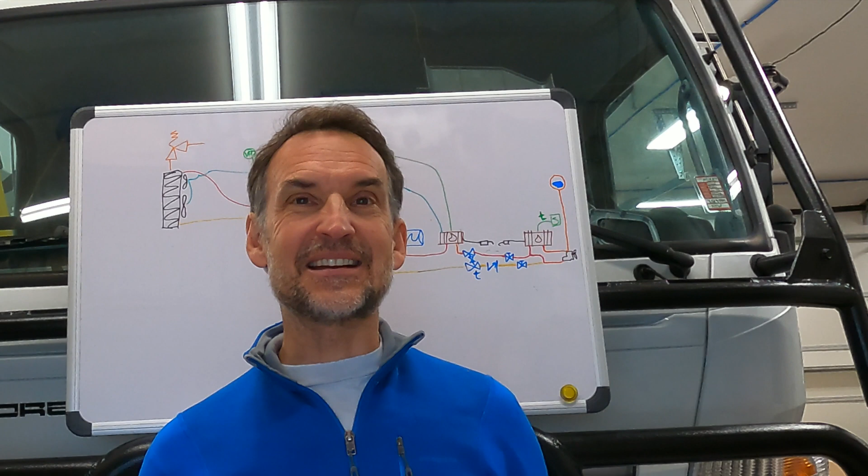Hey van campers, how do you keep yourself warm and heat your van and your water while you're camping outside in cold weather? As you can see today, I brought it all out for you. I've been growing out my scruff because it's been cold and it's wintertime and I'm trying to keep myself warm. So today we're going to talk about van heating systems, how to heat hot water, how to heat the air, all at the same time in a do-it-yourself system. So let's get to it.

All right, so you want to go skiing, right? You want to camp out at the ski resort, or you want to boondock and camp outside nearby. Something I've done quite a bit of. And how do you keep your van warm?

Number one thing is really good insulation. I've talked about this before. Great insulation in the walls, the ceiling, the floor, and also the cab area. I've also talked about why I like curtains, because they overlap. They don't just insulate the windows, but they overlap the window frame and the door frame as well. Then they keep that warm, because most of these van windows have a very poorly insulated window frame. So even if you're insulating the window with a little window shade, you still get cold air, or heat, being transferred through that window frame. So curtains cover all that up and help you insulate all of it. They can also separate the cab, or at least insulate your windshield and other areas like that really well.

Bottom line is, we're going to get into hot water and heating systems today. We're talking about what I did in my van, Mountain Bluebird. I've talked about before how I've loved to go out and camp in the cold and the snow. I'm looking outside right now and there's feet of snow outside, and I've been camping out there. I'm actually going back out tomorrow morning, and I'm looking forward to being out there, even though it's going to be cold. The weather forecast is saying it's going to be down to about 0 degrees where I'm going to be camping. Now, how am I going to stay warm?

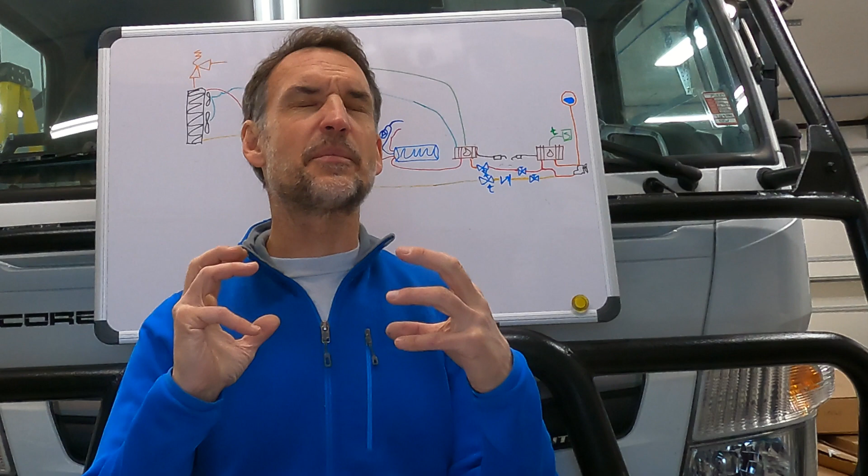I did this with a hydronic heating system. My last van, I did with an air heating system. An air heating system is very much like the D2, as it's commonly referred to, the Diesel 2 air heater, made by either Espar or Webasto, or a couple of other manufacturers. It connects right into our diesel fuel tanks on our Sprinter vans, which have an auxiliary fuel output. Those are about the size of a shoebox, incredibly compact. They put out a tremendous amount of heat and heat up very quickly, which is great for getting really quick heat in your van.

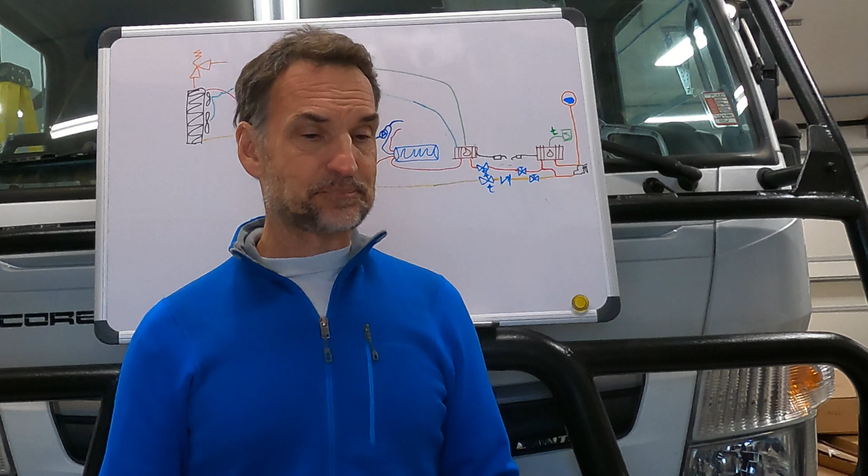But they do not heat hot water, and that's the downside. They're also pretty noisy, which is the other downside. When I had my D2 in my previous van, I didn't have any hot water system, so all I could do is heat the air. Still an advantage, but the downside is I found it pretty noisy, and I did not like using it because of the noise it created.

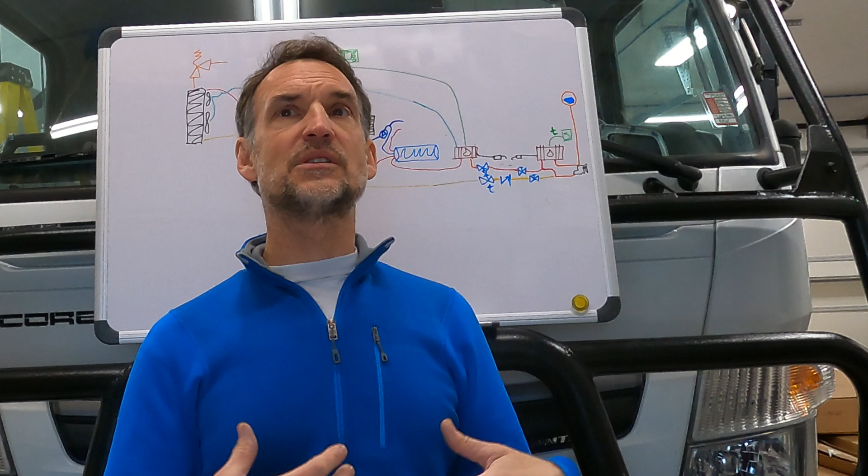So I wanted a quieter, more gentle heating system in my new van, and also one that heated hot water. One of the ways to do that is with what's called the D5, made by the same manufacturers, also using diesel. There's also the B5, which uses gasoline or petrol. That heats hot water. So if you're heating hot water, how do you get that to hot air? I'm going to talk through it here.

There are a lot of different people who make hydronic heating systems, and people will install air heating systems. If you're not comfortable doing it yourself, by all means have someone else do it. There's lots of information available on YouTube and other places to learn how to do that. It isn't too hard to install an air heater. It's pretty simple—you basically drill a hole in your van, connect an auxiliary fuel line, and hook some power up to it. Maybe those things sound scary to you. If they are, they're not that difficult, but by all means just have somebody else do it for you. There are plenty of qualified and experienced installers out there.

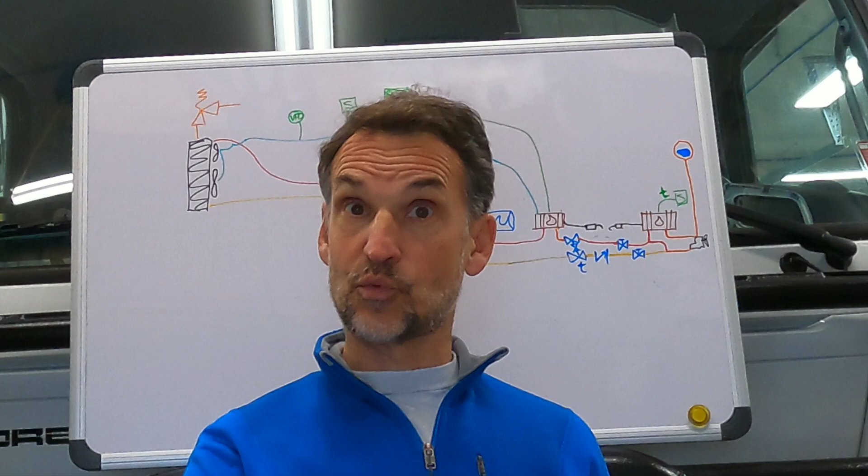When it comes to the D5, it is more complex. You're also running water systems to it, both a supply and a return, a cold and a hot line going to it, and it's a bit more complicated than that. There are companies out there that make really good hydronic heating systems—Rixen's is a great example. You can go to Rixens.com and buy their package, and either have it installed or install it yourself if that's more comfortable for you.

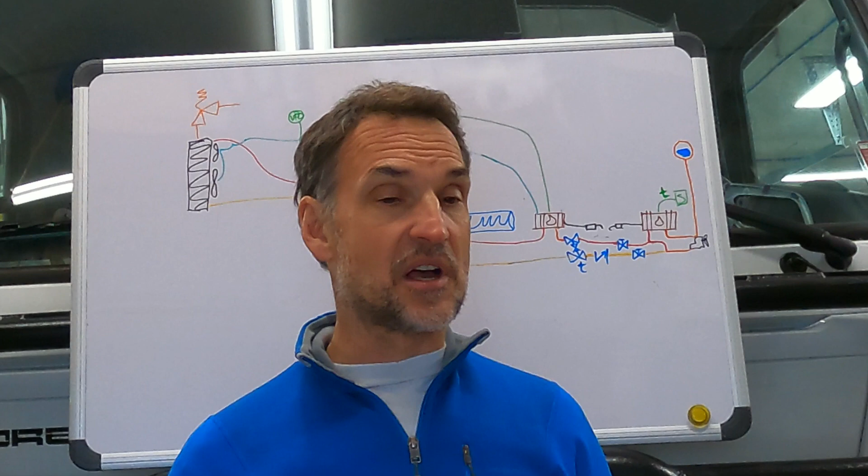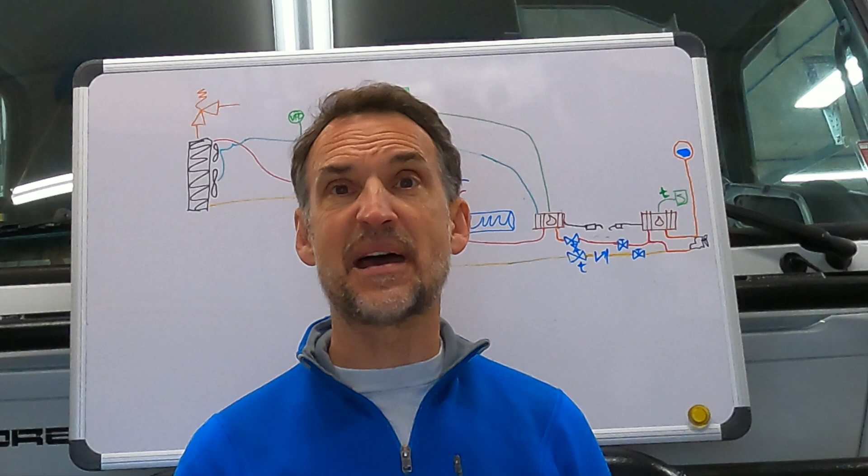I chose to take the do-it-yourself approach. So I basically figured out all the components that I needed in the system to make it work, and I found that it works tremendously well—actually a little better than I had even anticipated. I'll go into more detail about how well it works, but let's go into how it actually works and what I installed.

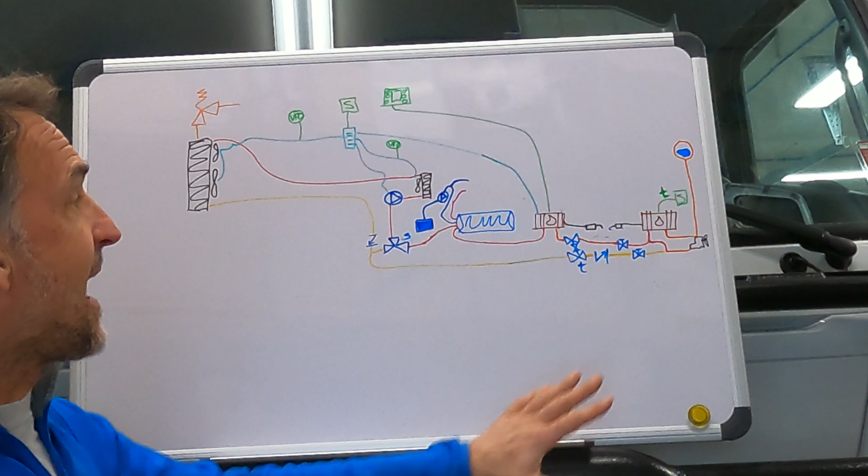We have the factory D5 right here, designated by this, which my Sprinter van I ordered with the factory D5. Unfortunately, that will only run when it is below 37 degrees—when the temperature sensor on the van detects it's 37 or below, then I can run it. And I have to have the engine running to run this one as well.

There's 4 different heating option systems with auxiliary heaters that Mercedes offers, which is fantastic. But I chose the one where it does have to have the engine running and it has to be below 37 degrees. Now, this is really an auxiliary heating system.

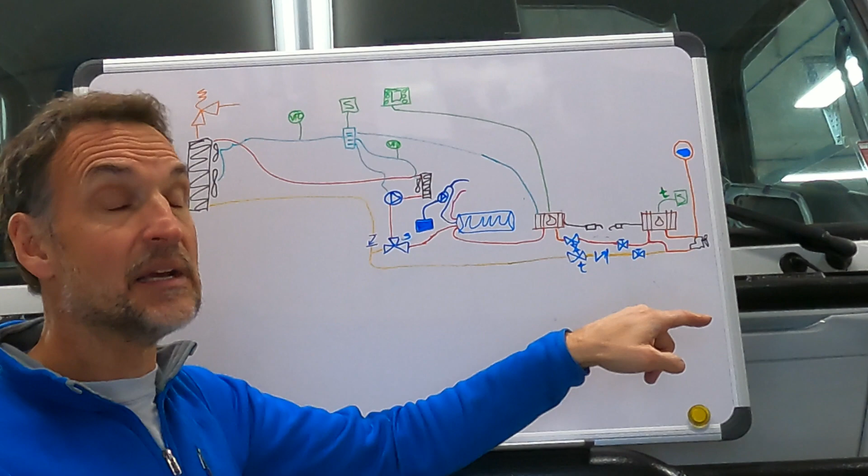It heats the engine up much quicker when it's really cold out, which is great because this diesel engine does not heat up well when it's really cold and there isn't much load on it. So like coasting down a hill, for example, or just cruising on a flat highway without a load. If you're climbing a hill, great, or even around town, it'll eventually heat up, but it does take some time. But that helps heat it up much, much quicker.

And I can idle the engine for 5 minutes or so, or even just a few minutes, and within those few minutes I'll get the engine coolant up to at least a moderate temperature to start getting a little bit of heat out. Now, the Sprinters also have an electric heating within the dash, and those auxiliary heaters will turn on when it senses it's cold and it doesn't have warm coolant yet going to it, and it'll actually put out electrically heated air out of the dash.

Now, it's not hot yet. It won't really get hot until we get up to a higher coolant temp, when that also augments the electric heating. And then once it gets about 175 degrees Fahrenheit coolant temperature, it'll shut off the electric auxiliary heaters. You'll actually see your voltage pop up a little bit, maybe a tenth of a volt or so when those shut off, because they're a pretty substantial load. I think they're about 40 amps or so. And you also will feel warmer, hotter air by that point too. But this helps it get there far quicker.

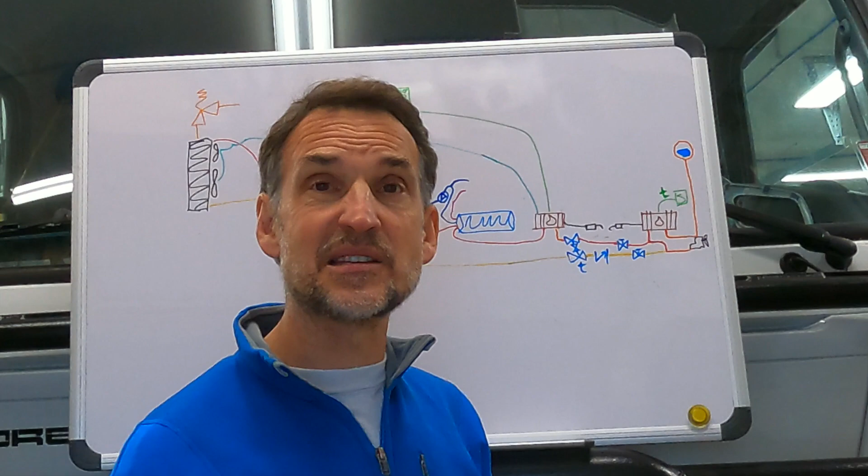And I found that when it's pretty cool out and I don't have much load on the engine, it can take 15, 20, even 30 minutes for the engine to even get to a reasonable temperature, say between about 150 degrees to about 175 degrees. With the auxiliary heater, it can get there in about 5 to 10 minutes. So it definitely speeds it up quite a bit. It also gets you heat out of your dash much quicker.

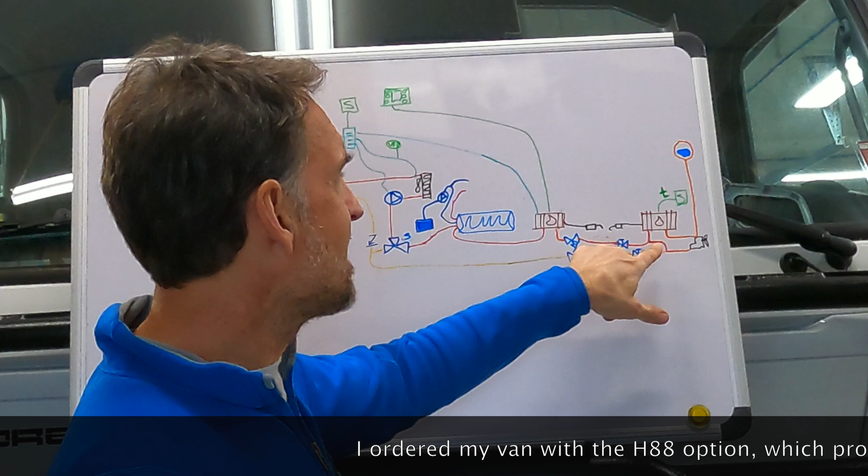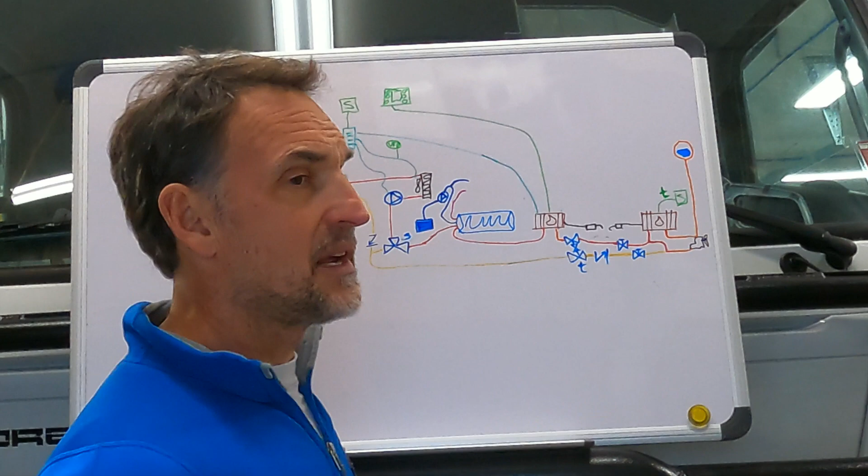Now, this system connects into the engine. And it is a switch on the dash, all through the factory system, and that's the temperature sensor that controls it. I tied into this system, I put in 2 isolation valves. That's what these are indicating here. So one in the supply, one on the return. And the supply then goes into basically an Espar factory product. They call it a 5 or a 6-way valve.

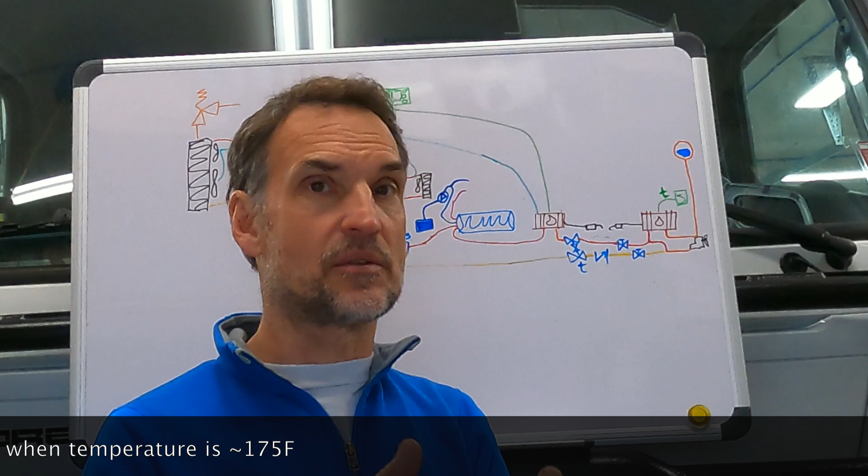It's a thermostatic valve, and it has a little thermostat sensor in between the two linkages that will open up if it's above, I believe it's 175 degrees also. And so in that case, if I've got hot water coming from the engine that's 175 degrees or hotter, it will allow that to go on to my heating system. If it's not above that 175 degrees, then it will not go into my heating system.

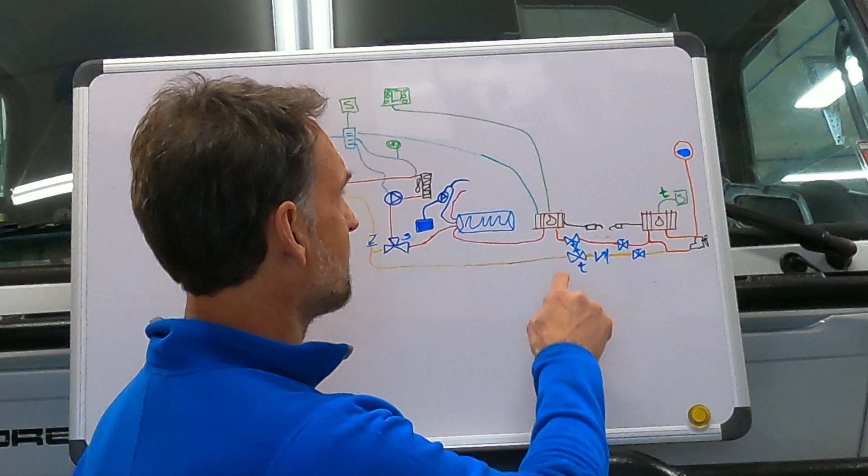And really I should have a pen here, but there's a linkage here between these two that isn't shown, and I should have shown that here. These two link in really to that same spot here. So I should have drawn that a little bit differently, so my mistake there. So basically the hot water from the engine and the factory D5 will go on to my hot water tank.

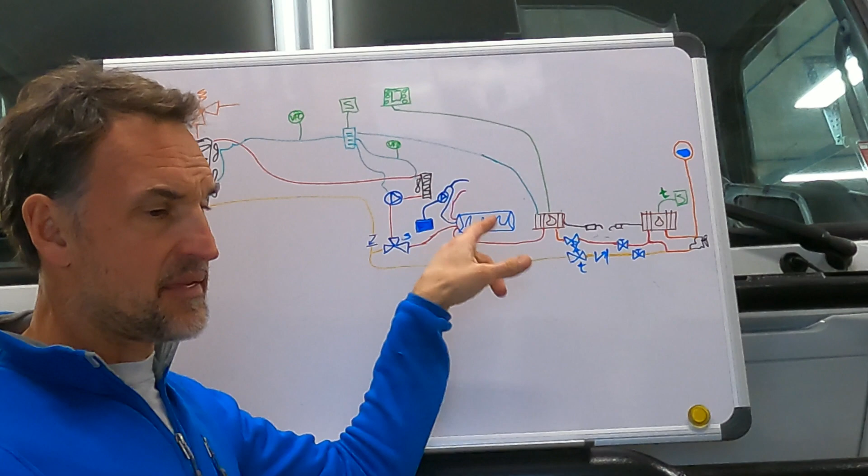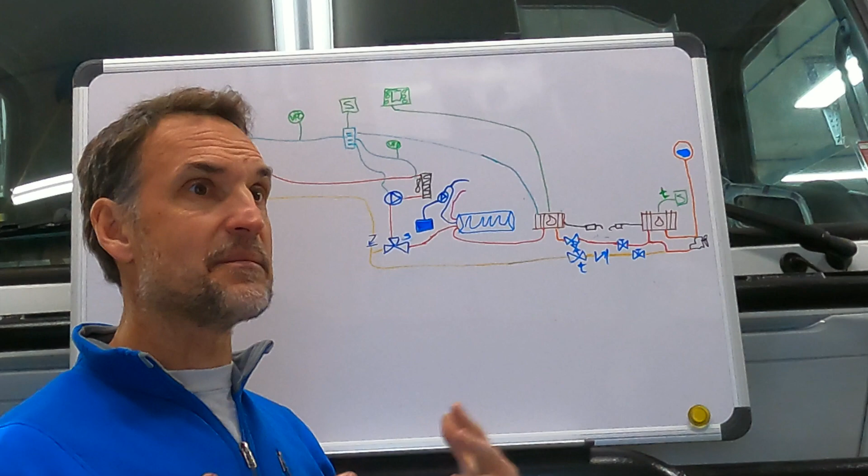This is an IsoTemp Slim 5-gallon model. It fits incredibly well between the factory sill and the internal frame, basically between the fuel tank and the outside of the body. Fits incredibly well in there, and they have 4, 5, and 6-gallon versions of this.

It has a coolant heat exchanger in there. So the hot water coolant will go through that exchanger, and in there is a hot water tank, and it'll heat the hot water, right? It transfers that heat from the coolant to the hot water, and then it can pass on that coolant onward.

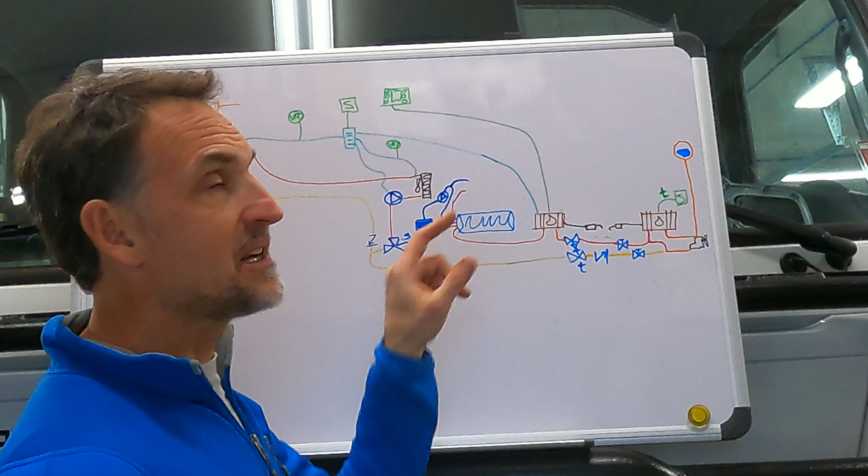Before we get to that, let's talk about the second D5 that I installed, and that's this one right here. This second D5 I can control by my single switch, that single switch being up here. When I turn that single switch on, it also powers my 2 fan coils, one in the front, one in the rear. The one in the rear is larger. It's right underneath my bed, so it heats up the garage and the bed area very nicely. There's one in the front, which heats up underneath my front seats.

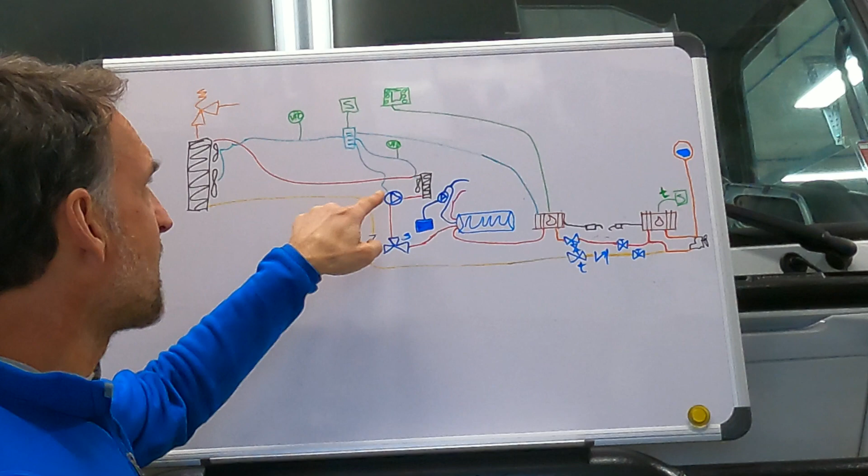And I say the front seats, my front camping seats, not the passenger and driver seats. And it heats that up. It also powers my variable speed fan controls for those fans. It controls my pump, which circulates that water, and also the thermostat for the D5. Let's get into all that in just another minute.

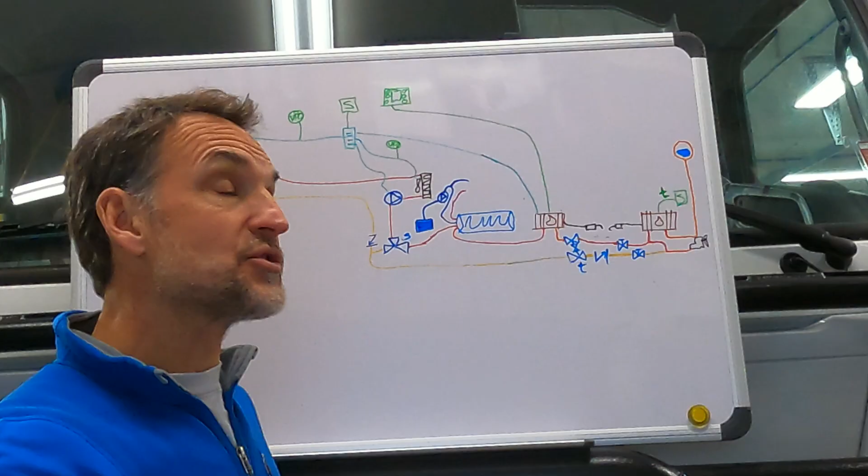This hot water from either D5 will go on to my IsoTemp hot water heater, and that heats hot water that goes on to all my plumbing fixtures. This is my pressure pump for my domestic water system, which pulls from my tank, and that goes out to all my fixtures from here. This hot water comes in, heats that coolant, and then it goes on to this 3-way valve, which is also switched by my switch up here. So when I turn on my one heater switch, it activates my fan coils, my circulation pump, my secondary circulation pump, and opens up this valve.

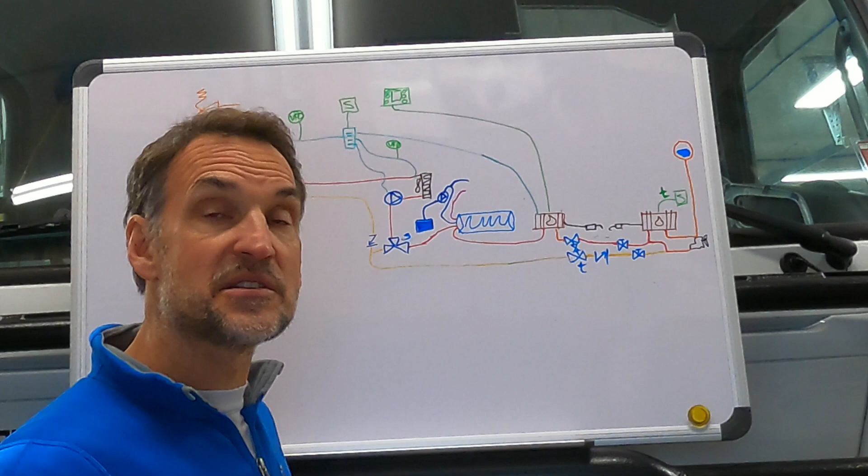The reason why I have this valve in here is so I don't have hot water flowing through my fan coils all the time whenever that coolant is above 175 degrees, heating up the interior of the van unnecessarily when it's not needed. Otherwise, when that switch is off and closed and I don't have heating called for, that coolant simply returns back into the engine system.

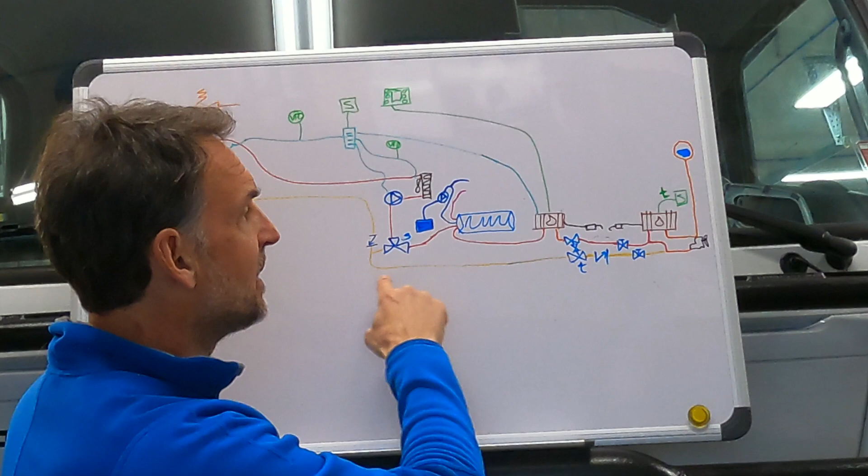A couple things to note here. This is a check valve, so that coolant cannot go backwards up through the coolant system. There's also another check valve here, even though this is my return, because the coolant is generally circulating pretty freely through the engine. There isn't really so much a directed supply and return on the engine. This way, it can't come backwards as well.

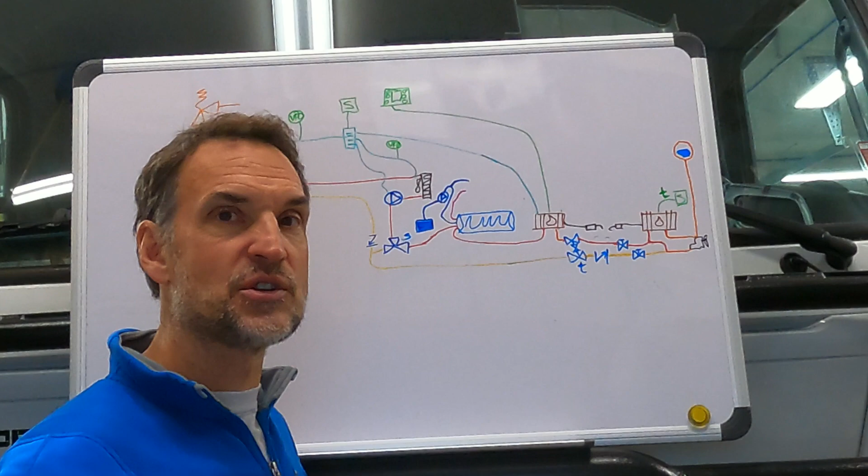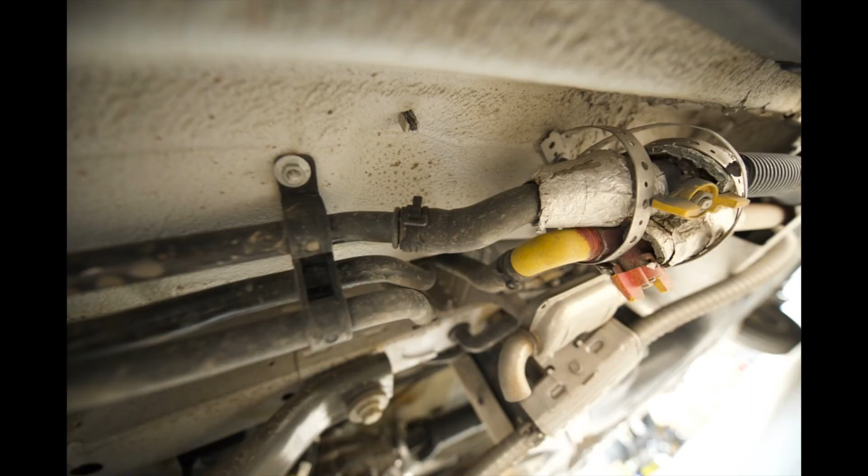Another point I really want to make, and that's my third point, is that this whole coolant system is at the same level. The benefit that provides me is pretty big. I don't have to have my own expansion tank for my heating system. The coolant reservoir expansion tank for the engine happens to be higher than both of my fan coils, even though they're not quite drawn this way. Both of my D5s are mounted exactly at the same height, as is the hot water heater. The bottom lines are all below the expansion tank for the engine, which is pretty high up on the van.

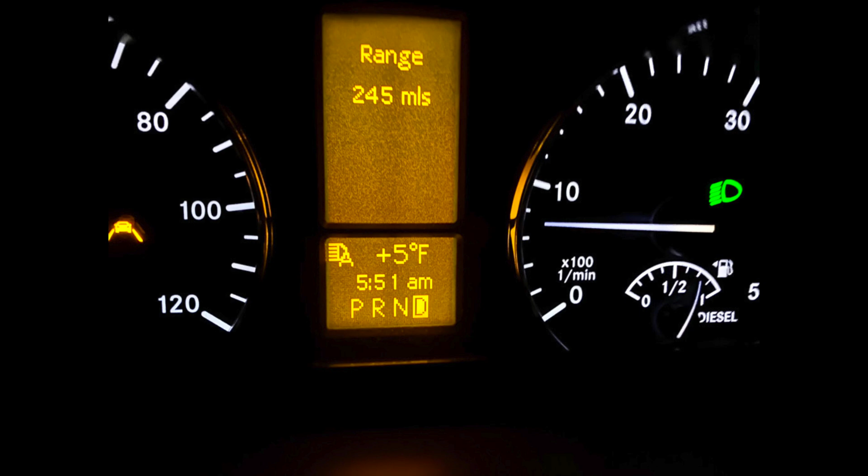This means I don't have to have a secondary expansion tank inside the van, with the potential for leakage or fill issues. I have one place to fill my coolant system. It's all combined together. From a safety point of view, these 2 isolation valves allow me to isolate that off. I've not had a single leak in the system in 5 years of operation. I've camped down to 5 degrees, and I've driven and camped in lots of temperatures below freezing and have been perfectly fine and warm.

All of my system has fittings and hose that are designed and rated to handle basically between -40 and, I think, 250 degrees operating temperature. Some of those components can handle even more. That's in Fahrenheit, but -40 is the same in centigrade and Fahrenheit. That's the temperature rating that all my components can handle.

So I know they can handle what the engine can throw at it, which basically tops out at about 230, 235 degrees Fahrenheit, and certainly what I'm going to camp out in, which is probably nothing below -20. The 5 was even probably an anomaly. Normally I wouldn't be camping out even below 20 degrees Fahrenheit, but I know it can handle that. It's handled it fine. There is, of course, antifreeze in that. That antifreeze is generally rated to about -20.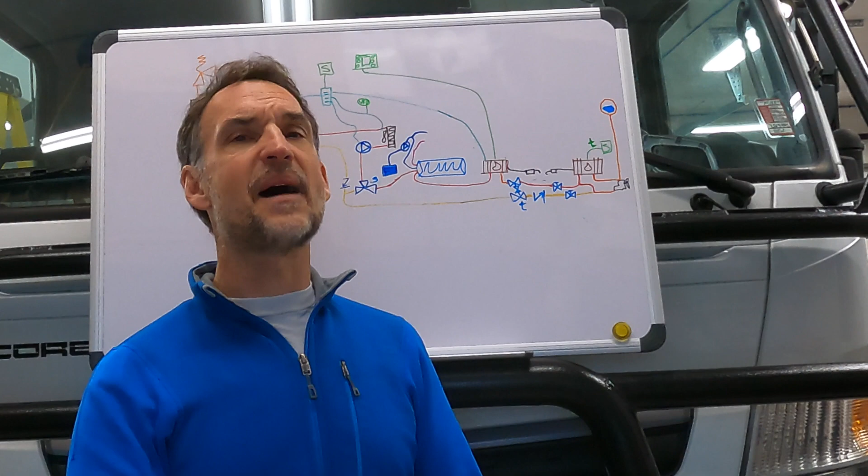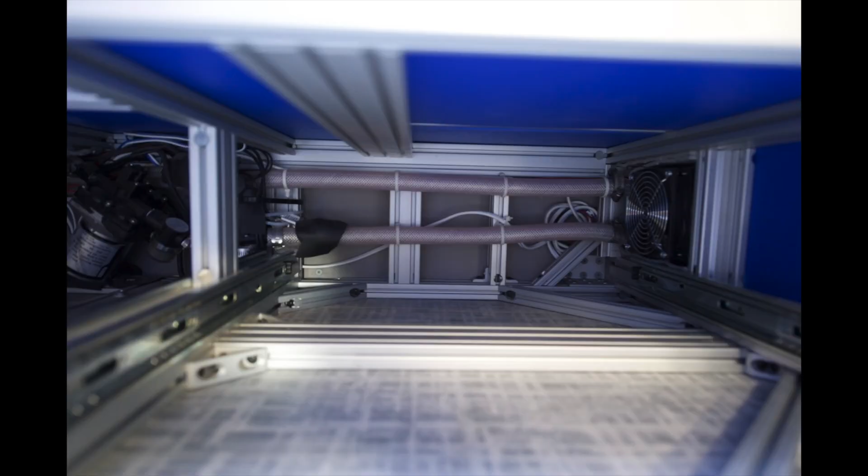So back to my system here. So hot water from the tank here flows on a 3-way valve. If that is open, because I've switched it open, my single switch that all this is powered from, then it allows that heat to go to my auxiliary pump, which also is powered by that same switch. Goes into the fan coil. The fans are powered by that same switch, and it just simply circulates through that, again through this check valve and right on back towards the engine.

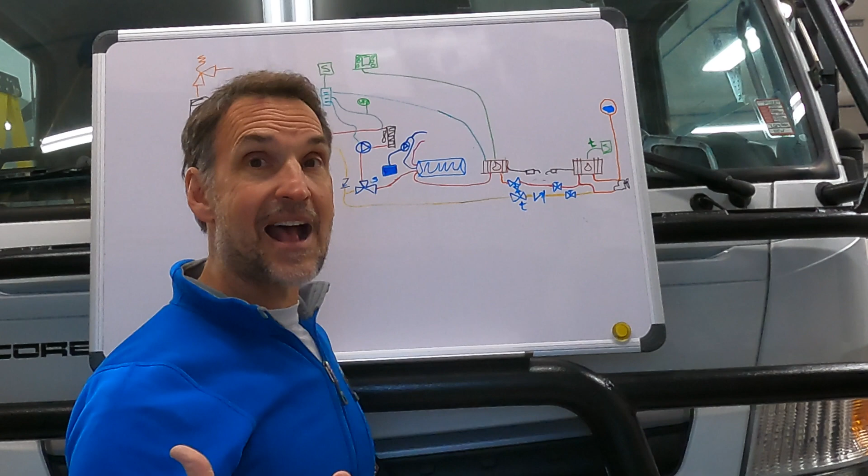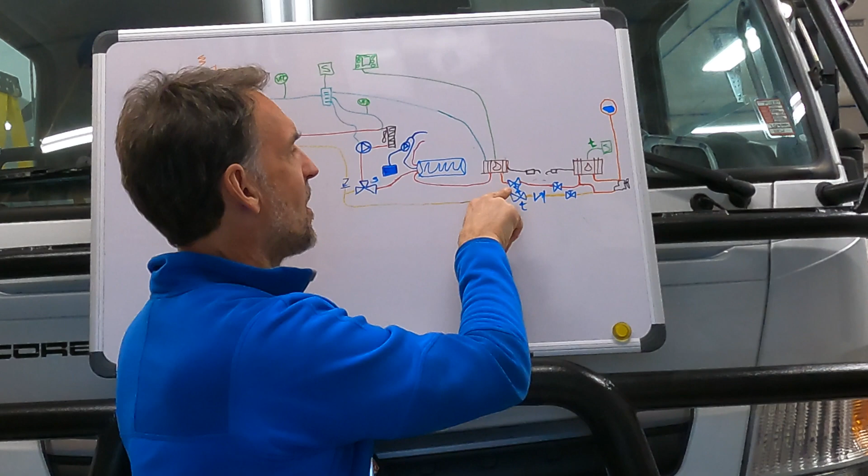Now, the reason why it goes back towards the engine, if there is a pressure that needs to be equalized, or some sort of hot gases that build up in there, it can escape onto the expansion tank and so forth in the engine. So same way as the engine's dealing with it. Otherwise, if it's hot enough, it will circulate back through my D5, if it's running. I have this drawn not quite perfectly, but it'll circulate back to the D5. The D5 will reheat it and it'll recirculate back.

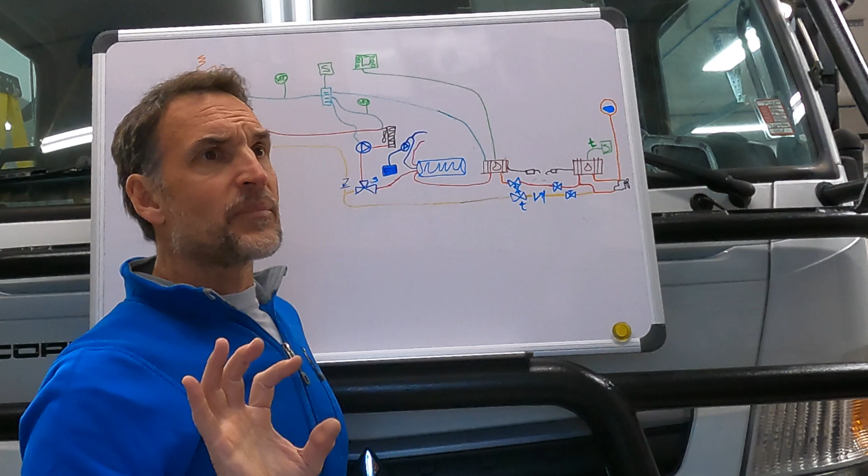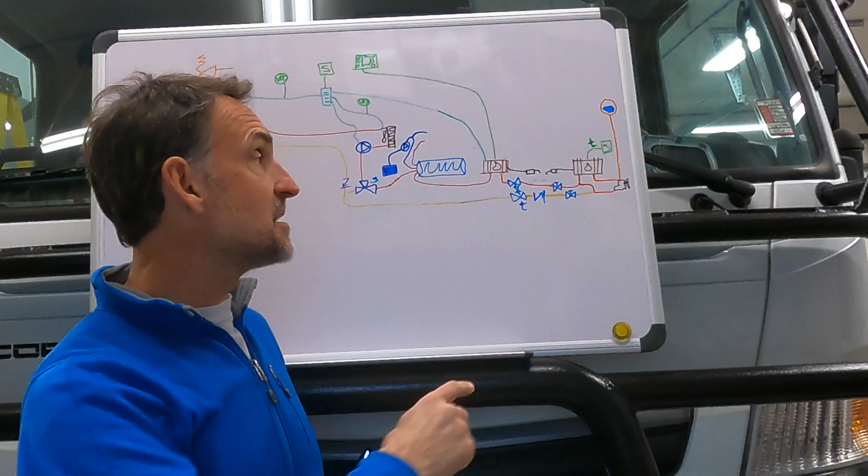And I can keep that circulation loop running through my heating system as long as I have that heating switch on. This circulation pump, and this will be open. And what I found is that once I shut the D5 off, for about 5 to as much as 15 more minutes, I still have heat that I can pull from that system, because this heating system's heating up to between about 100 to about 140 degrees or so.

So I've got a lot of heat in there, and a lot of heat's being stored in my hot water system here, this hot water tank. So I can keep pulling that heat from that for some period of time, so I can shut the heater off and still keep getting some residual heat without the heater running. It's a real nice benefit.

The other benefit the system provides is it also gives me a second auxiliary heater for the engine, so I can heat up the engine even faster, as well as the van. So by turning both these on at the same time, when I'm below 37 degrees and I start the engine, they both are now heating up. They both run perfectly fine off the single auxiliary fuel tap that comes off the fuel tank, and they just tee off of that for the fuel. They don't take much fuel at all.

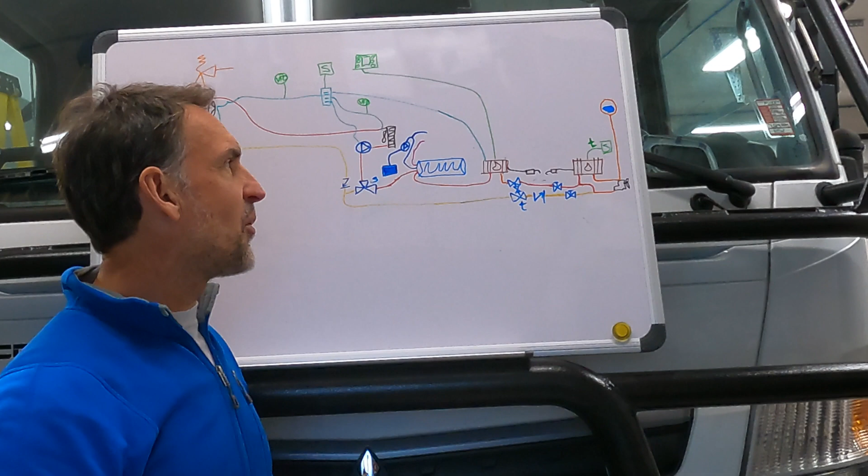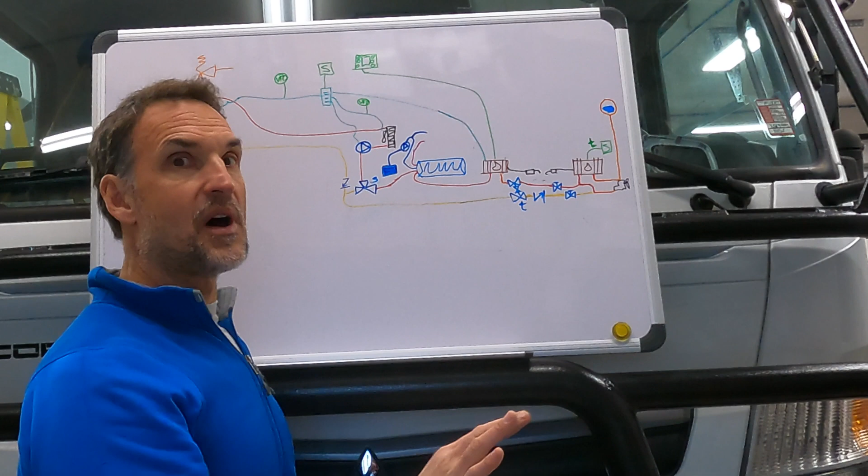They sip fuel. I think it's 0.06 gallons per hour for these heaters on their high mode. They have a high and a low mode, 0.03 gallons per hour in the low mode. So that little 1/4-inch tube, or a little less than that, 3/16 tube, is more than enough to supply that fuel. So I can turn them both on at the same time.

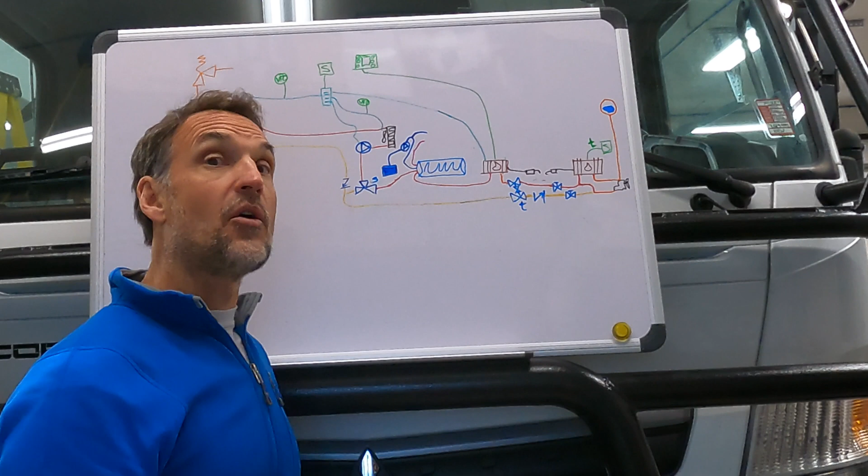Now what I've done is I'm heating this coolant loop to get more heat to the engine to help it heat up quicker. When it's really cold, I found that's definitely an advantage. I get heat then out of the dash, so I can get some warmth. And also I'm warming up the whole camper, which is cold because I've been camping out in the cold, right? And the engine's cold, so it gives it a chance to heat everything up quicker.

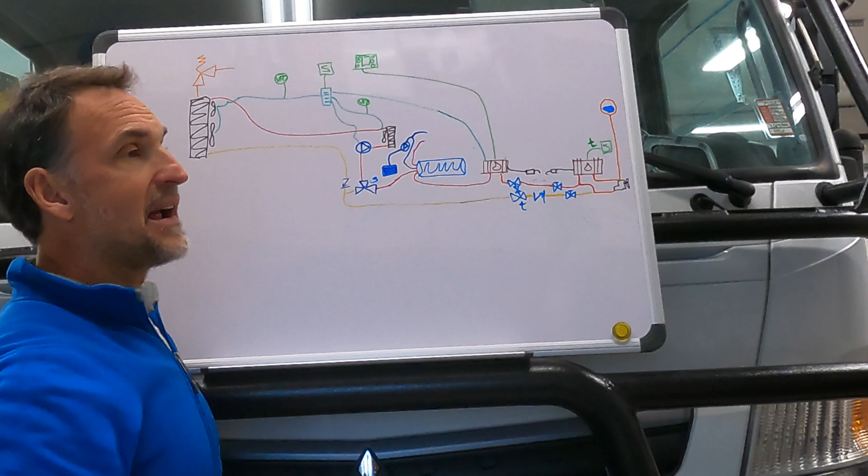Now, a couple of key points here I want to point out. My D5 is operated by the programmable thermostat, and so I can program that, control my temperature set points or time and period to run it and all that stuff, and that's on its own, so I can run the D5 on its own.

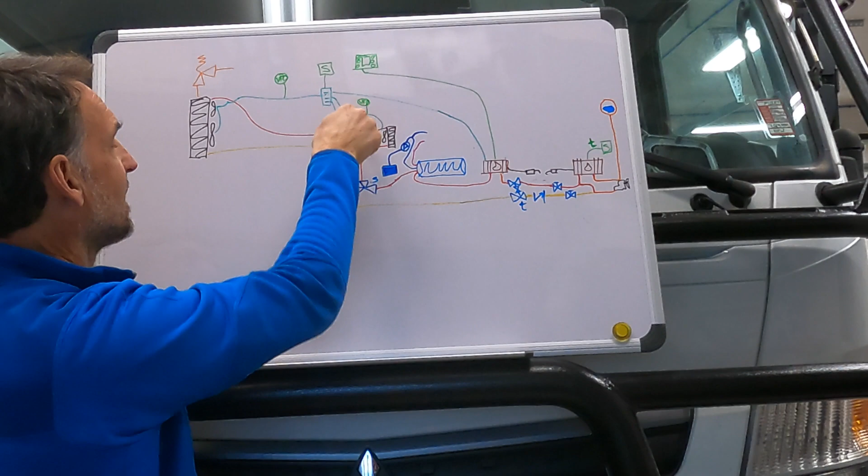This switch now, the single switch I can reach from bed, turns everything else on, including this switch, which I don't have a connection drawn to. They're really just little tiny PWM controllers. I think they cost like $5 or $8 a piece. They're not expensive. These fans are pretty low, I would say about a half an amp to a full amp between the small and the large fan coil.

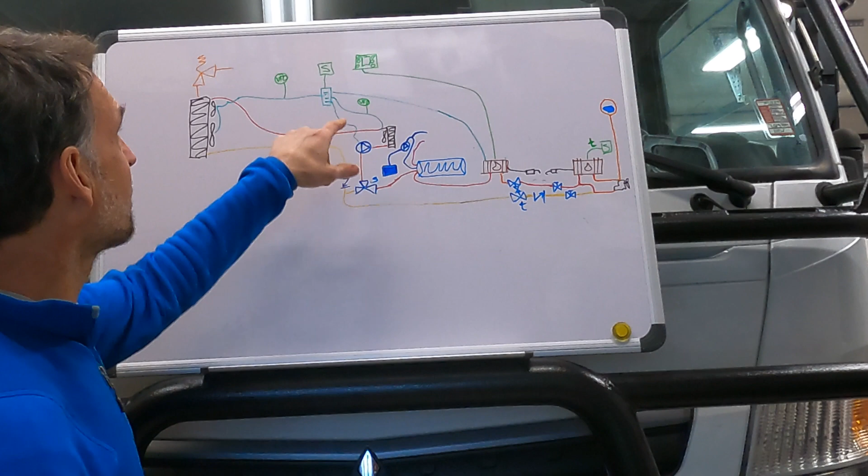So very small loads. And now I could turn up those fan speeds, and I found that to be a real advantage for a few reasons. One is that if I'm in bed, I don't need as much heat up front, so I could turn that fan speed controller down, and I can reach that from bed as well. It's right by this heating switch here. So I could turn that down, and just have all the fan way up in the back by the bed, and therefore most of the heat directed to the bed area, right?

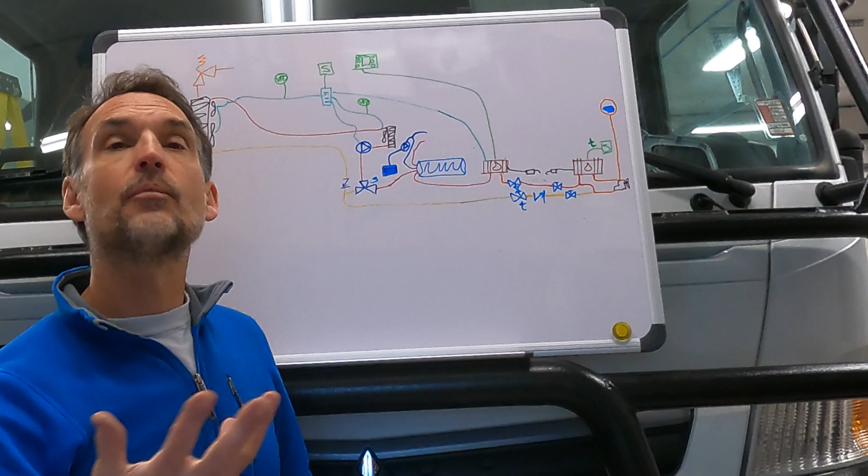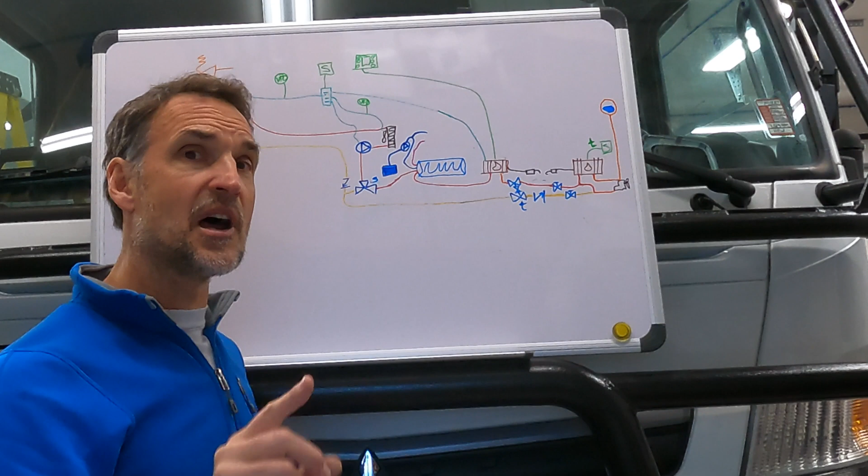Vice versa, if I'm in the front, I'm making breakfast, I want to get that warmed up, I can direct that heat to the front. So that works out incredibly well for being able to control it. Or you can just turn them both all the way up, or you can turn them down. So if you like to sleep with a little bit of heat going, you can have that D5 running. It's all the way in the front of the van. Both of these exhaust out about the same spot, just underneath the van.

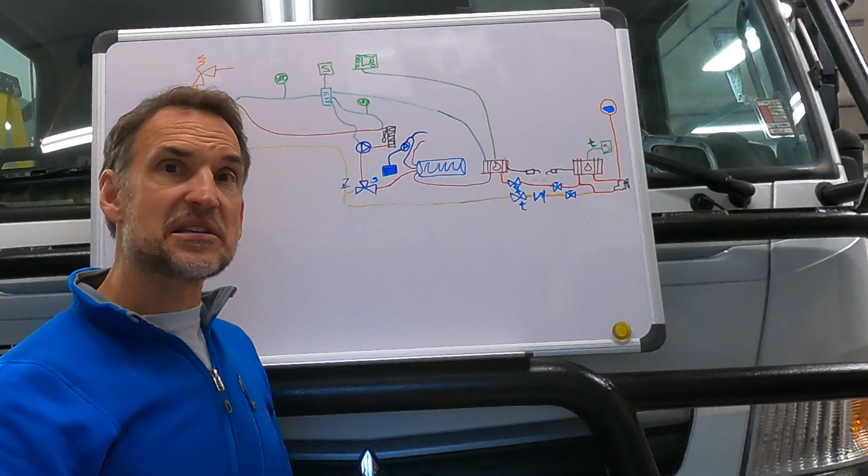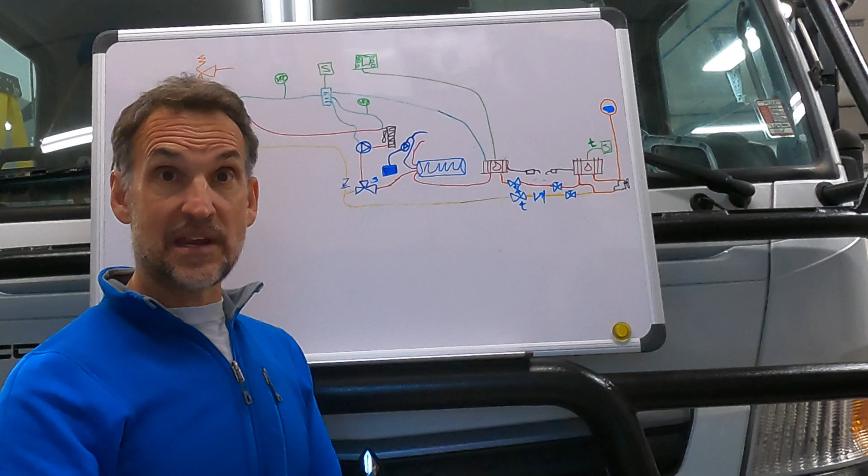I can have it running, turn those fan speeds way down, and you could be sleeping and just have a nice little bit of very comfortable heat coming out. Not like that D2 where it's like a furnace, with a lot of thrusting air coming out. These you can barely hear, if you can hear them at all when they're on low. You have a nice gradual heat coming out. So it's really nice when you're on a phone call, or if you want to sleep, or whatever else you want to do in there. So that's one advantage of it.

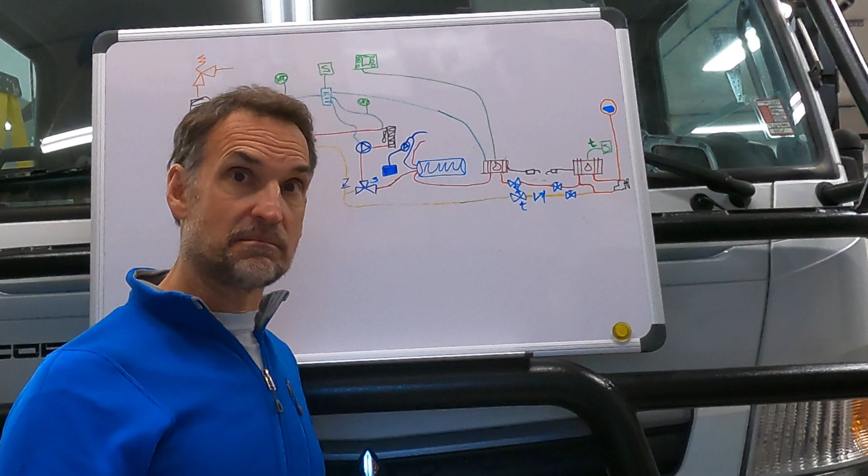A couple more things I want to point out, so that if you do take this on yourself, you make sure you're thinking about these things. One more thing is, I also have a pressure relief valve up here, and it's coolant rated. Everything in here is coolant rated. All of my check valves, everything's coolant rated. Most of it's stainless, but nonetheless, everything is specifically coolant rated. It's an air release valve, and it's there so that when I fill this system up, which again is all filled from the same factory expansion tank, it accommodates all of it.

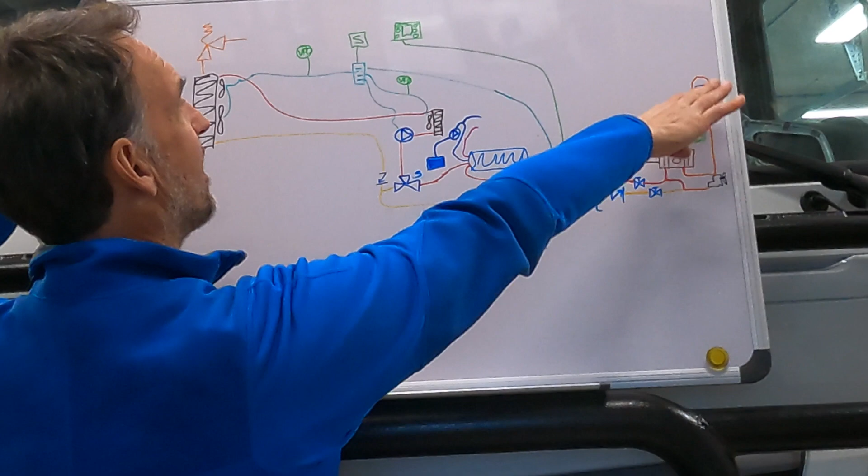And again, this isn't drawn to scale. This expansion tank is higher than this fan coil by a significant amount. Both these fan coils are mounted at the floor of the van. The expansion tank is mounted about 2 to 3 feet above the floor, so pretty high up there. But just to make sure air doesn't get trapped in the system, that's the key thing there. The other couple things you want to think about: one, air trapped in your tank here. You could get air trapped in this tank, so how to think about that, or also how to drain it.

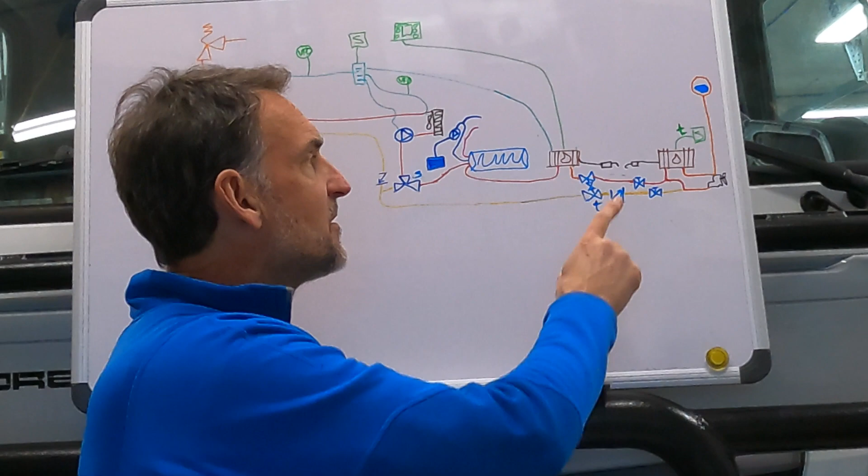Also, another thing to think about: I see a lot of people, when they add a D5 hydronic heater, or even an air heater, run the exhaust out underneath the sill of the van. That's a good idea for getting the exhaust out, but it definitely puts that noise and those emissions out towards your neighbors, wherever you're camping and running it, whether it's in a ski parking lot, as an example. The factory one does not do that. It just dumps straight down out of the heater, which is basically right underneath the driver's seat.

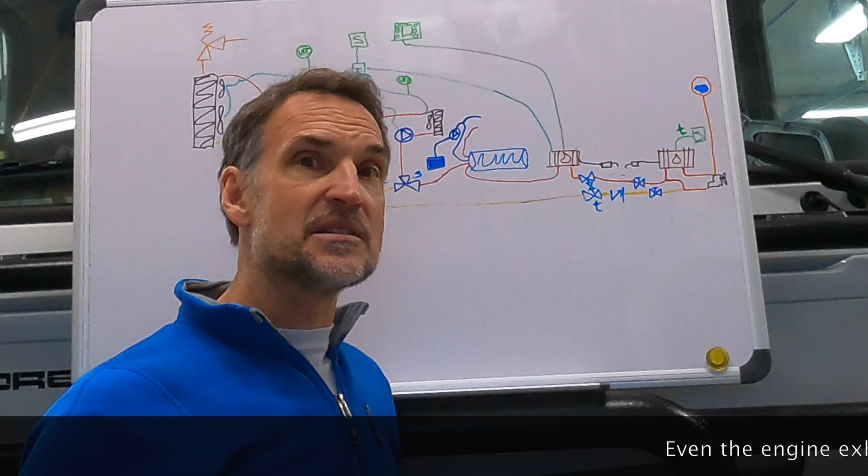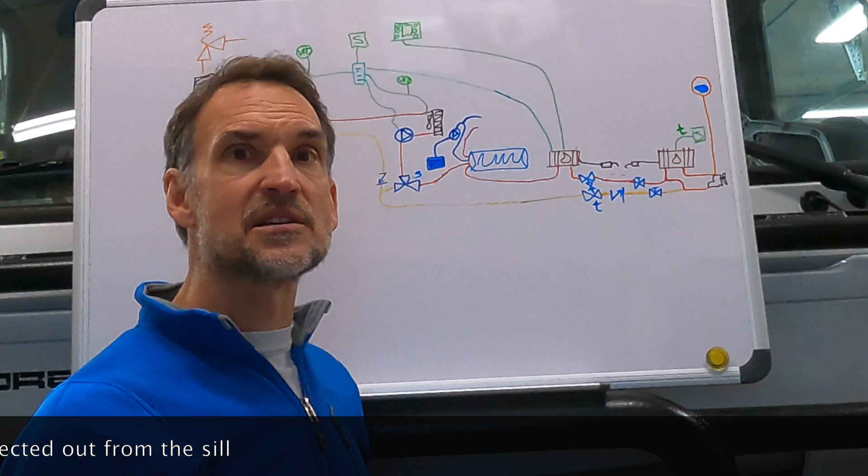The bottom of the van is incredibly well sealed up, and running that as well as running this other one, which also dumps out right underneath the van there, I've never smelled it or noticed any fumes or anything inside. I have a CO sensor inside, and I've never picked up any of those fumes. So I don't think those exhausts need to go underneath the sill.

I do see them sometimes get a little bashed up or caught up on weeds and stuff, or rocks if you do go down trails. And like I said, it puts a little more noise towards your neighbors. Underneath the van, you don't really hear it as much as when it points out the side. So that's another thing to think about.

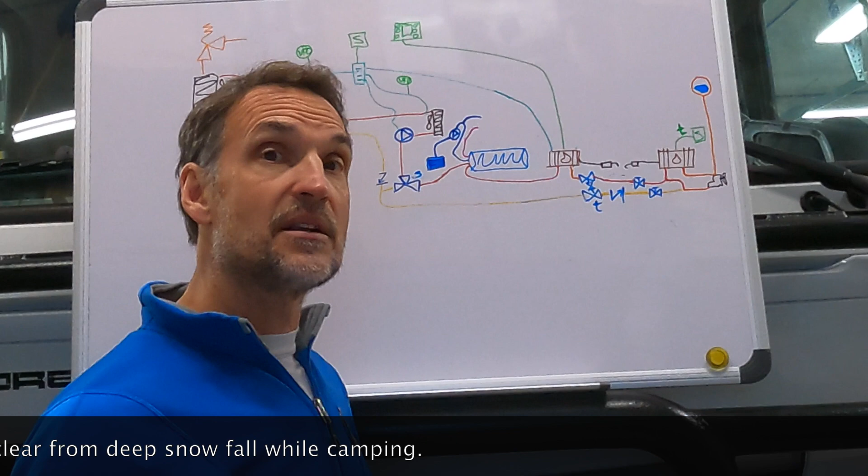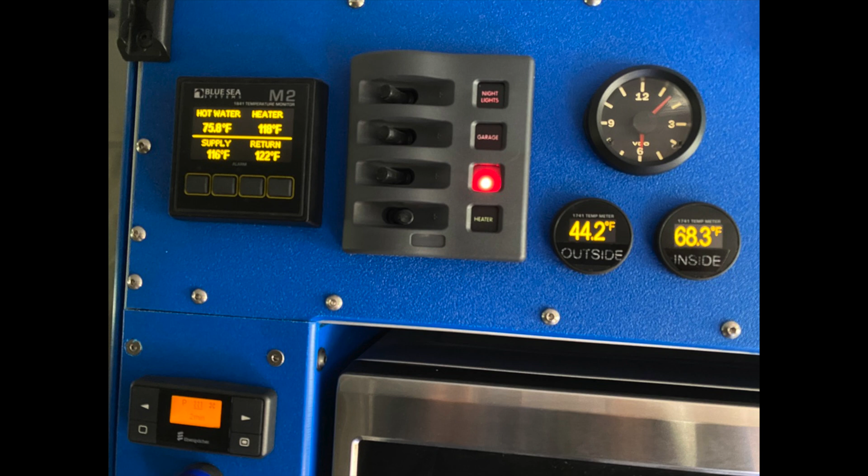One more thing to think about too is I actually have 6 temperature sensors as part of this system, and they're all just purely for monitoring. None of them do any control, but 2 of them are just interior and exterior temperatures, and they're back by the bed too. So I can flip on a switch that powers those on, and that way I can turn them off at night so it stays dark.

I turn that on, I can see what the outside temperature is, and I can see what the inside temperature is, and I can go, I think I'm going to run the heater. It's pretty cold out, or I need to put on some more clothing for going out today, right? It's a really nice to have thing, and those temperature sensors are pretty inexpensive.

I run the temperature sensor for the outside one all the way down underneath the van. It's all the way back, kind of just in front of the rear wheel well. So on the driver's side, opposite of where the exhaust is on the passenger side, so I don't have any exhaust influence. I don't really have any engine influence because it's so far back in the van, and so that works really well for picking up an accurate outside temperature.

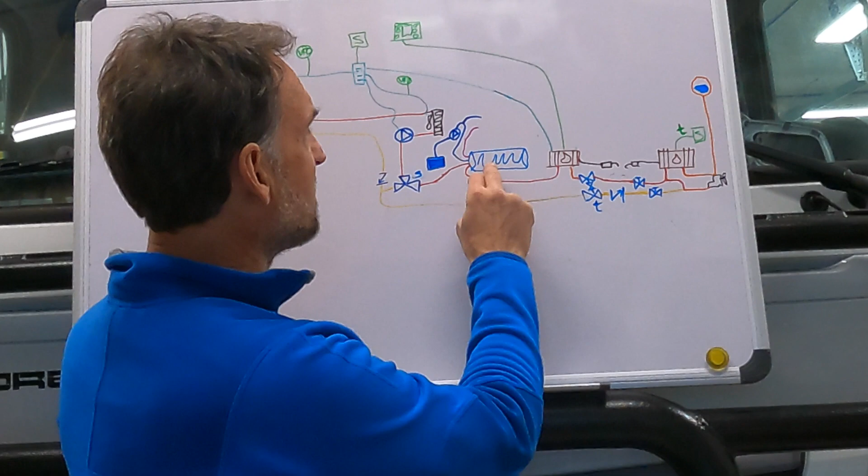The other 4 temperature sensors, I have them on my supply and return of my heating system. So what's the temperature of the water coming into my heating system? It's actually, I believe, right here and right about here. And so I have those temperature sensors essentially taped and wrapped with insulative tape around those tubes.

It's great. I can turn on that one Blue Sea OLED temperature sensor. It's got the 4 temperature sensors on there. I program which each one is, and it just tells me what those readouts are, and of course also graphs them over time too, so I can see. And so the nice benefit of that is I know exactly that my system's working.

Now, I've never had it not work, which is fantastic, but it tells me also how quickly things are ramping up. Obviously, it's going to depend on ambient conditions, how cold it is outside or inside, and when's the last time you ran the system and all those things. But I've noticed I can keep hot water in this tank for about 24 hours after I've run the engine or my D5.

And another key point is that every time my engine's running, once this coolant from the engine gets to 175 degrees, it allows that water to pass on through, and that automatically heats my hot water. So for the most part, every day I have hot water for free. I don't have to turn on my D5 to get hot water. It is free hot water, extra from the engine, right? And so it just automatically does that.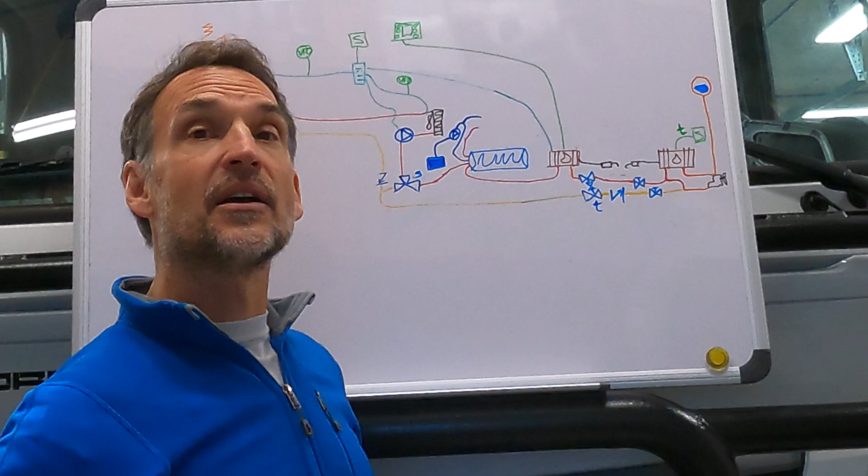And all I've done is really just add a little bit of additional radiator to the factory engine by letting the coolant come back a little bit further and go through a heat exchanger in my hot water tank. It's a real benefit to always having that free hot water.

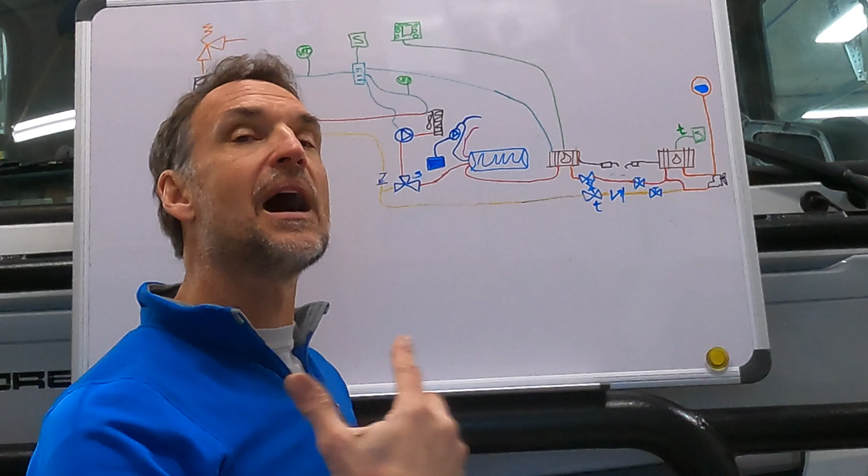The other benefit that provides is within several hours after running the engine, I can turn on the heater and still pull a reasonable amount of heat off of that by turning on my heating loop only and not the D5, and get a little bit of heat. So if I want to run that heater for just say 5 to 15 minutes, I can get the heat out of this for about that period of time without running the D5 at all.

I just want a little bit of warm up. I don't even have to turn on the D5, assuming I've run my engine recently. Say I drove into camp, I've been in there for a few hours, made dinner, getting ready for bed, and it's a little chilly. I just turn on the heater, no need for the D5. I can suck the residual heat from the engine stored in that IsoTemp hot water tank, right? That's become a thermal battery, and I can pull off of that.

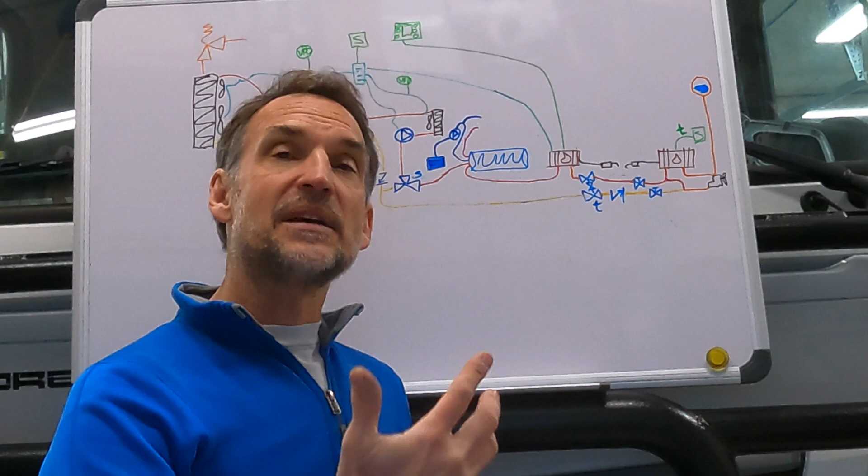By doing that, I won't have really hot water in the morning, but by morning it's all going to cool off anyway. If I'm camping in a cold environment, I'll probably want heated air and maybe heated water to wash dishes, wash your hands, wash your face, take a quick shower, whatever it may be. So I can do all of that.

Speaking of showers, this system works great running off engine heat for washing your hands, washing dishes, washing your face, stuff like that, for about 24 hours. But if you want to take a shower after several hours of running the engine, you won't have enough heat for a longer shower. You'll need to run the D5 if you want a shower over a few minutes. So it's great for short, common uses, but if you do want to take a shower, then I turn on my D5.

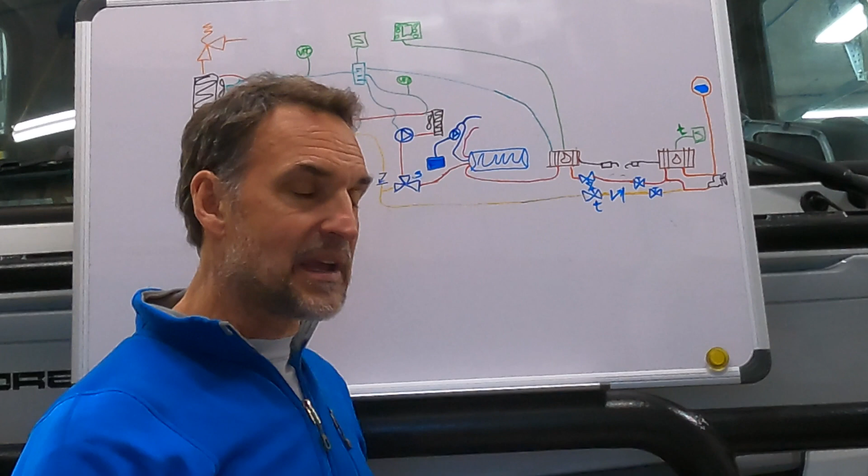That keeps the hot water coming. What I've noticed is the D5 kicks up to its high mode, heats up the hot water, and then quickly throttles down to low mode, because even in low mode it's still putting out enough heat for shower water.

Because shower water, when you think about it, is heated to about 140 degrees or so, but in a shower you're really only using about 95 to 110 degrees, something in that range. So by the time you mix it with some cold water, you're not using that much hot water, and it can keep up on low without much issue.

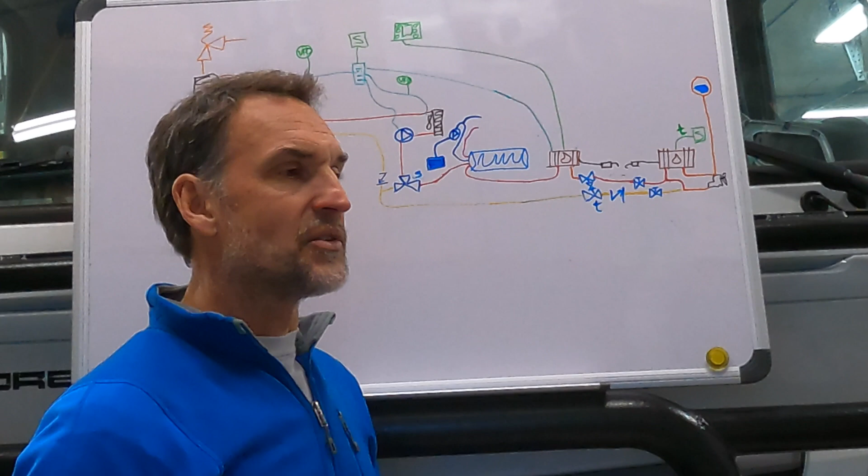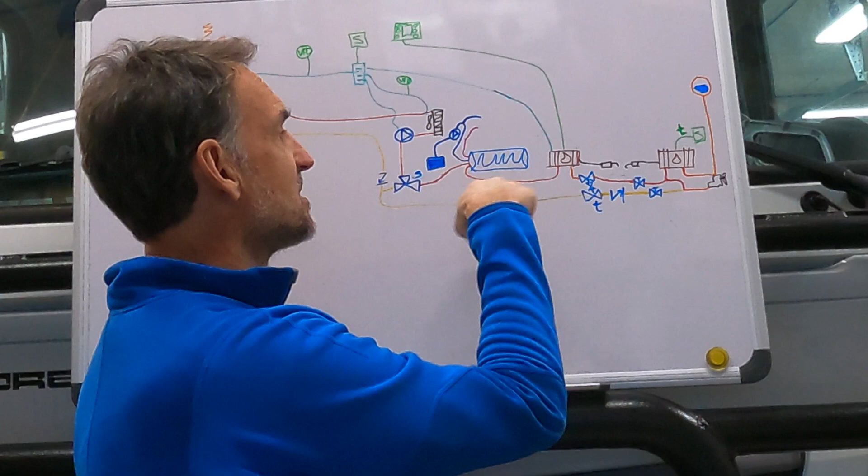On a longer shower, occasionally it just kicks up to high for a minute or two, then back down to low. So it has no problem keeping up, and it regulates that on its own just by monitoring the temperature of the system as it travels through.

So that is my heating system that I have in my van, Mountain Bluebird. I'm going to show a little more about some of the things I've talked about. I highly recommend this system because it's worked great for 5 years in really cold environments.